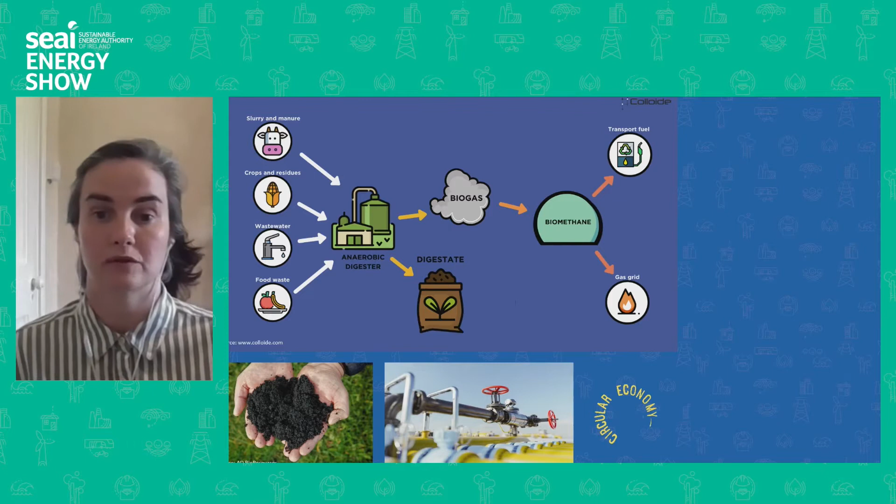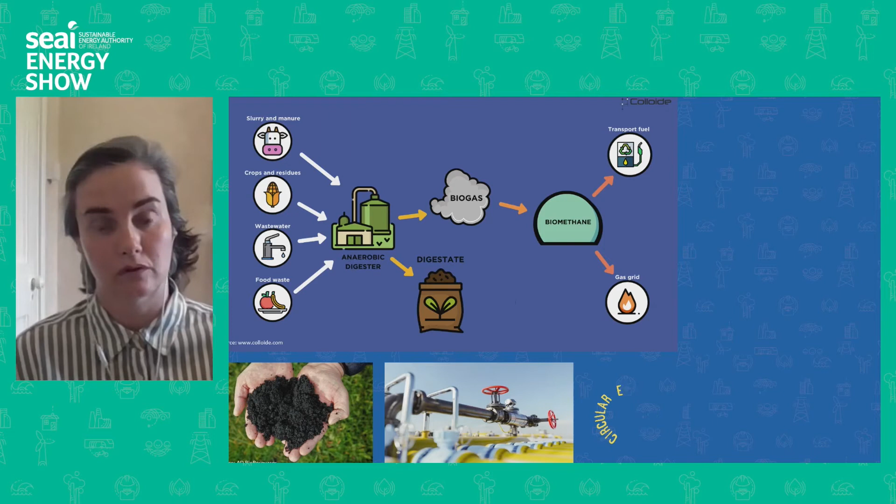Now, for those of you here that know what the anaerobic digestion process is, please bear with me, but part of my role with Green Generation is to make sure that everyone's understanding the process from start to finish.

So anaerobic digestion is the microbial breakdown of organisms in the absence of oxygen. It's the same 4-stage process that happens in cows' stomachs.

So there's two things that come out of the AD process: digestate and biogas. On the bottom left of the screen there, you'll see this digestate, which is used on local farms as a high quality eco-fertilizer.

The other then is biogas, which we upgrade on site into biomethane, and this is also known as renewable gas. So biomethane is a clean, renewable and carbon neutral fuel.

We use it to power our operations on site, in our HGVs, but crucially in terms of the circular economy especially, we inject it back into the national grid at Cush.

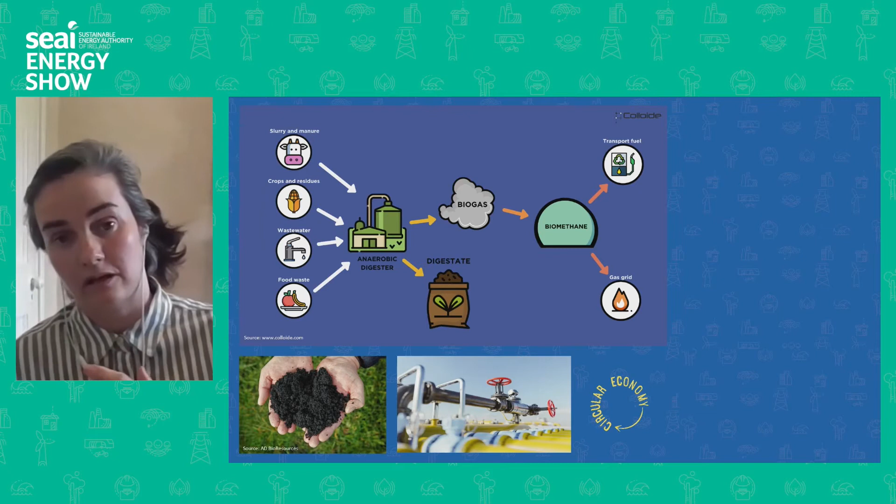On the top right of the screen there, you'll see the Industrial Development Organization circular economy plotted out.

The premise of the circular economy is that we need to move away from the industrial model of take, make, waste. We need to rethink how we see raw materials because we live on a planet of finite resources. The main tool against waste is to first design it out at source, which is optimal. Optimizing the useful life of raw materials is what it's all about.

Then come all the R's: repairing, reusing, reduce, replace, regenerate, and recycle. And then lastly is the reuse of waste as a feedstock for renewable energy.

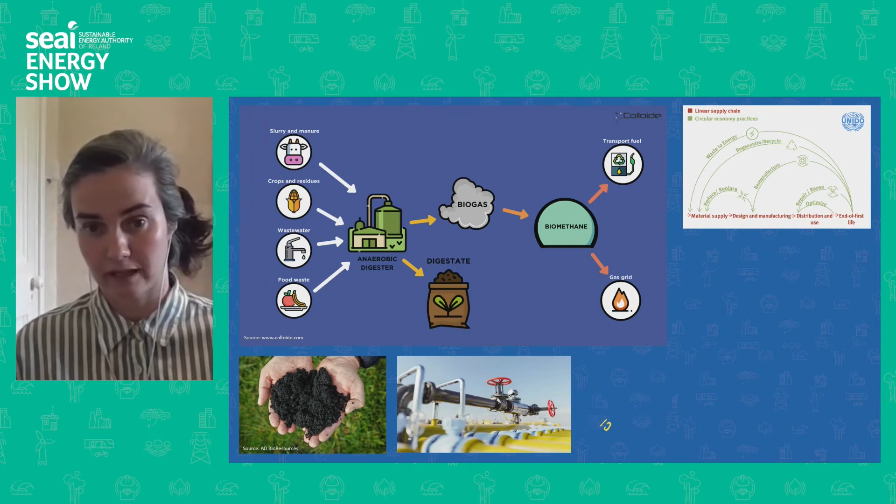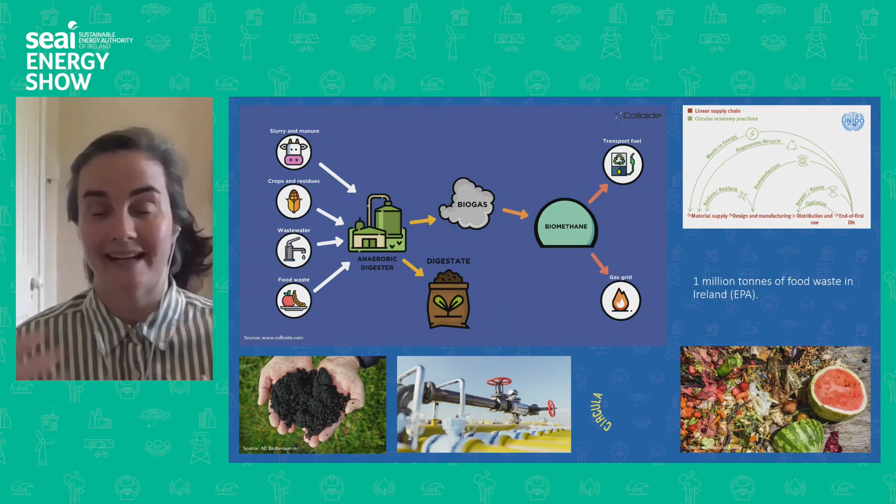Across Ireland, we have 1 million tonnes of food waste every year. Some of it going to AD, some to compost, but sadly an awful lot is still going to landfill. Our main aim here is to make as good a use of this food waste as we can. To give you an idea of the extent of the global food waste problem, if food waste were a country on its own, it would come third only to China and the United States in its greenhouse gas emissions.

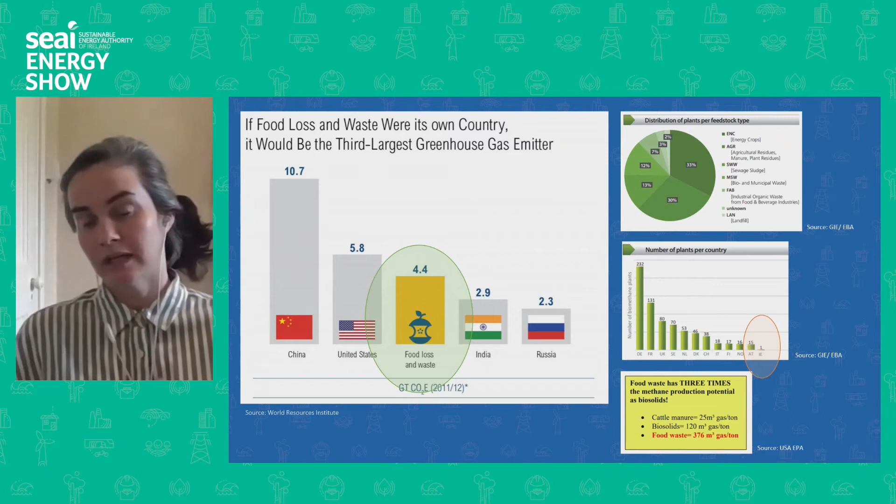But therein lies an opportunity as well. While no one wants any food waste, we can actually use that food waste and pull some value out of it. The GIE and the EBA released a report last year saying only 7% of all anaerobic digestion plants across Europe are using food waste as their feedstock.

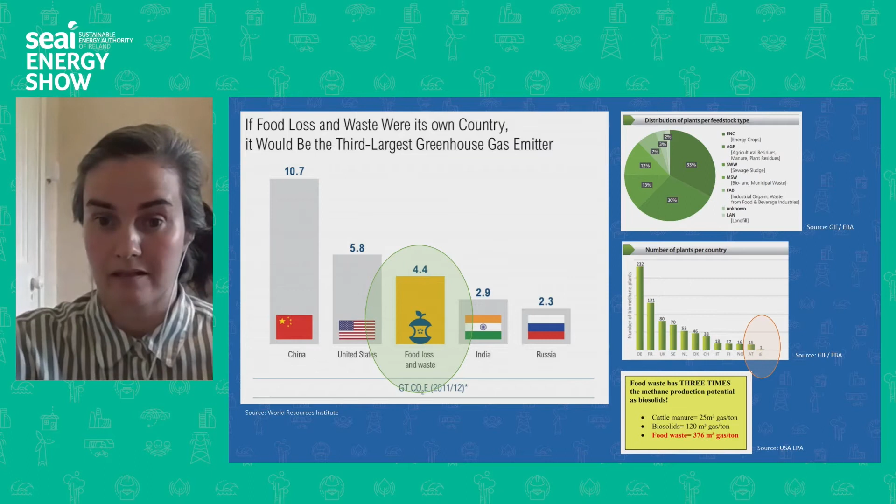And then you'll see the second graph down there. Ireland, we've long been described as the laggards of Europe. We've only one biomethane plant injecting back into the national grid, but you'll see Denmark there sort of halfway down. Denmark has a little over just under 1 million more people than us, and they're using 2/3 of the space, but they managed to have, I think, 47 biomethane plants across the country, which is extraordinary for a small country. So we should be looking to replicate that.

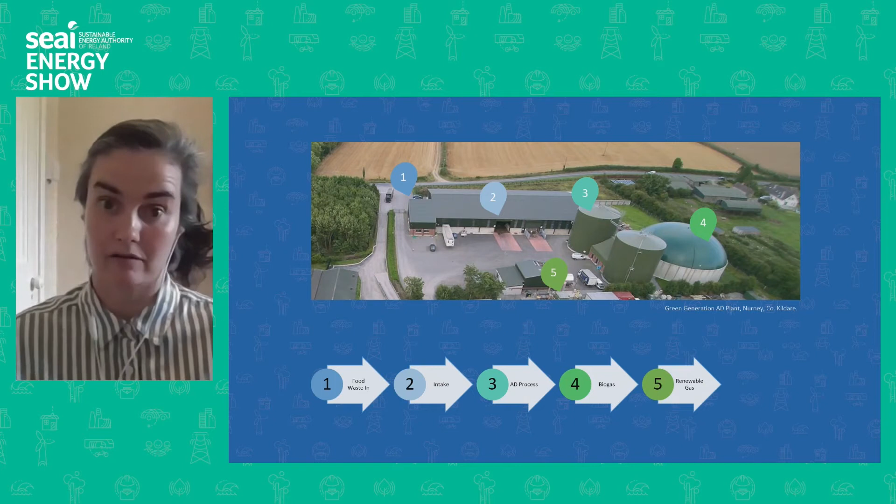If it comes from a manufacturer, it goes straight to the AD towers. If it comes from one of our retail partners, such as Tesco, the food is depackaged, plastic goes one way, food waste goes the other, and again straight into the AD process, which happens at number 3. Once the organic material is broken down, we capture the gas at number 4. Then, as I said before, we upgrade it on site, which is the very exciting part of our circular economy. Once it's upgraded on site, then our circular economy really kicks in.

Last May, the Cush injection point was opened. Green Generation is the only renewable gas company in the country commissioned to inject this renewable gas back into the national grid, meaning that the gas produced and upgraded in Nurney is brought here to Cush. The photo on the right-hand side shows us transferring the gas into pressurized trailers, which is then brought the 8 kilometers to Cush and injected back into the national grid. The picture below that shows a sneak peek at the engine room at Cush.

People often ask us, well, if it's that easy, why aren't loads of people doing it like the Danish? Unfortunately, the investment required in a project like this is enormous. This one was co-funded by the EU, Green Generation, and Gas Networks Ireland.

So I wanted to give you an idea in a very real sense of the emissions that can be saved from using renewable gas. The above information is what you would show as mileage to and from Dublin from Green Generation twice a week. So a return trip is 132 kilometres, twice weekly is 264. Over an annual basis, that is 13,000 kilometres.

Commercialfleet.org has a handy little website that translates your mileage into carbon savings if you're using renewable gas. So the journey we've just talked about using renewable gas will save you over 11,000 kilograms of CO2 per year, which we think is really a big win. But what does that all mean? In terms of planting trees, which a lot of people will connect with, the 11,000 kilograms of CO2 saved is the equivalent of planting 806 mature trees, which is great.

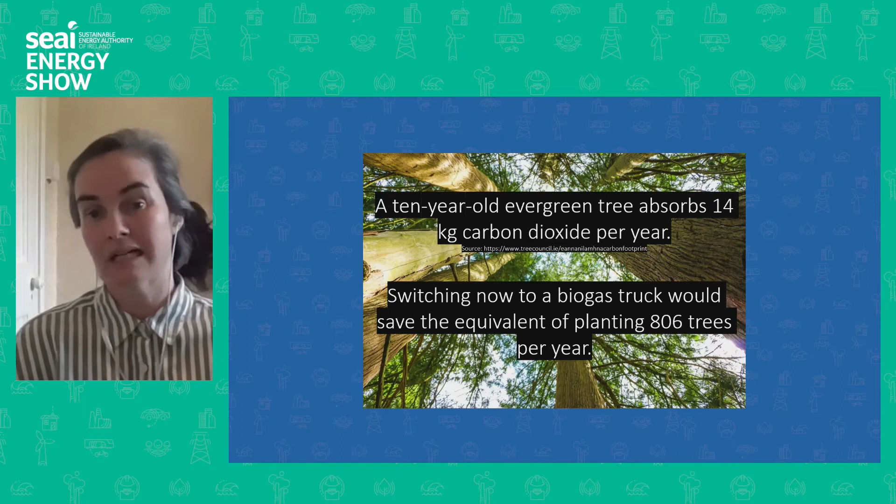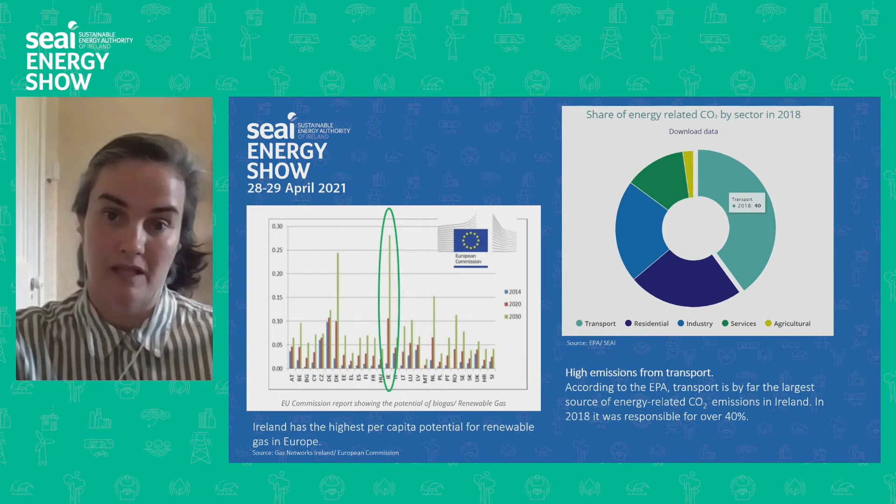But it's not all bad news. A recent report by the EC and Gas Networks Ireland has shown that Ireland has the highest potential for renewable gas production across Europe, and we'll need to harness all of that potential to meet these targets. Ireland's CO2 emissions by sector are shown on the right-hand side, and the transport sector is running at 40%, which is fairly hefty. That brings me to the topic of decarbonising Ireland's transport sector.

According to the Gas Vehicle Network in the UK, there's no other sector across Europe more primed and ready to cut carbon emissions than the HGV sector, particularly long-distance trucks. GNI see the same thing, and they've committed to rolling out fast fill gas stations across the country. There's two already, one in Dublin Port and one in Cashel, with another nine planned over the next period.

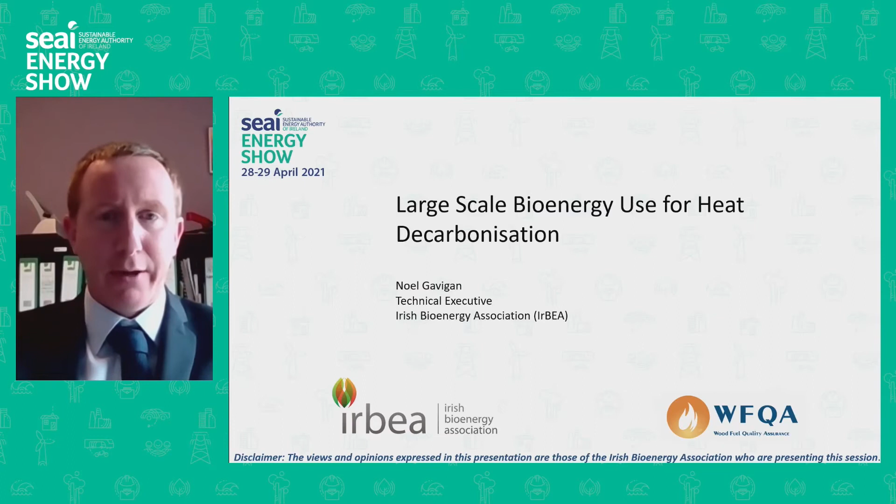Just a quick one on the Irish Bioenergy Association. This slide will be given to you afterwards so you can have a look at what we do. It's an organisation that represents the industry, established 22 years ago, and still going very strong. We represent all areas of bioenergy, from biogas to solid biofuels to liquid biofuels for road transport, and you have plenty more information on our website.

Two of the things that we do which are very relevant to this sector in terms of ensuring that the industry is operating correctly and ensuring that the industry is able to step in and take on large-scale heat use.

The first thing is fuel quality. We set up the Wood Fuel Quality Assurance Scheme back in 2009, along with assistance from the Department of Agriculture, NSAI, SEAI and Waterford IT. Within that, we ensure that fuel suppliers are producing wood fuels to the proper European standards, and also within that standard, there are sustainability requirements.

The big question always when it comes to bioenergy is ensuring that it meets sustainability requirements. We're very comfortable with material we produce here in Ireland because we know where it comes from and we can prove the sustainability of it. So it's a big part of what we do here in terms of making sure that the fuel supply itself is fit for purpose and is fully sustainable.

We have 30 certified suppliers nationwide, and we get continued support from the Department of Agriculture in that scheme. If you check the website there, you can see a map of the suppliers detailed around the country, and there's more details on that on the website.

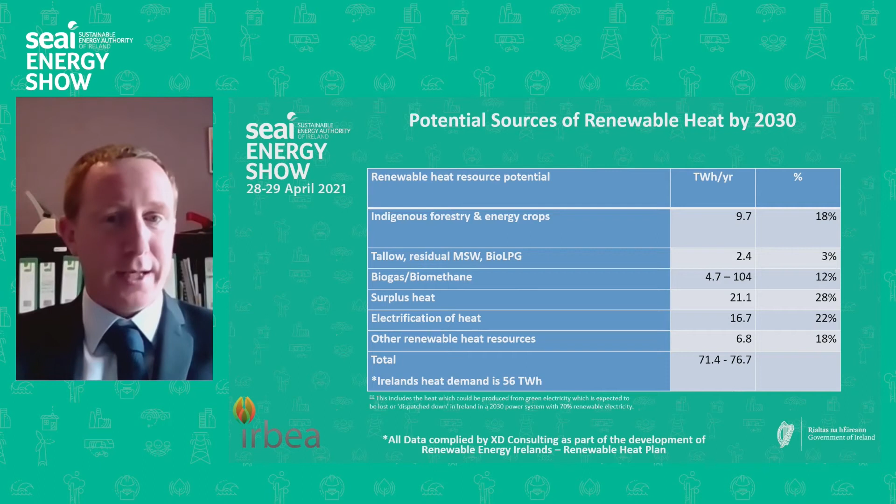We actually have resources for over 70 terawatt hours. So within the country, we have plenty of resources to actually meet that demand. It's really a case of getting things moving, getting the infrastructure in place, and getting the industries in place to meet that demand. The plan is looking at a level less than 100%, but we actually have enough to go to the 100% level if we have the wherewithal to do so. It's just an important point to look at there.

Within the bioenergy sector, we really have three main areas in provision of heat. One is wood pellet, which predominantly goes into the domestic market, commercial and small industrial. Wood pellet in Ireland, almost exclusively, comes from sawdust coming out of wood processing. We harvest our forests to produce lumber for the building sector and other uses, and we have large volumes of sawdust coming out of that sector, all of which goes into wood pellet.

Wood chip again is a byproduct of the forestry part of the industry, where you have pulpwood and thinnings, and material that is not suitable for saw log can be used as wood chip as a fuel source. It's a very abundant source - in fact, it's the largest source we have, and there are huge volumes available.

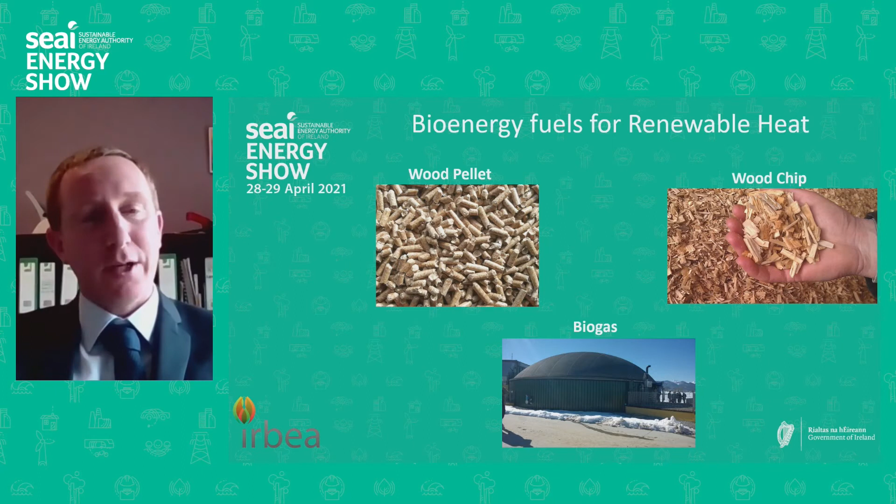Biogas was looked at already, so I won't dwell too much into that, but we can upgrade biogas into the grid and use that in gas boilers all around the country. Or we can use standalone units, which we're doing a project on at the moment, in particular where you have the feedstock on site - you can use that heating on site as well, which is a lower cost option.

So again, where is bioenergy's role and why is it important? Just very quickly, on a worldwide platform, bioenergy provides two-thirds of all renewable energy that's out there. So when you take hydro, wind, solar, geothermal, they're about a third when you add them all together. But bioenergy provides two-thirds of the world's renewable sources of energy at this point in time.

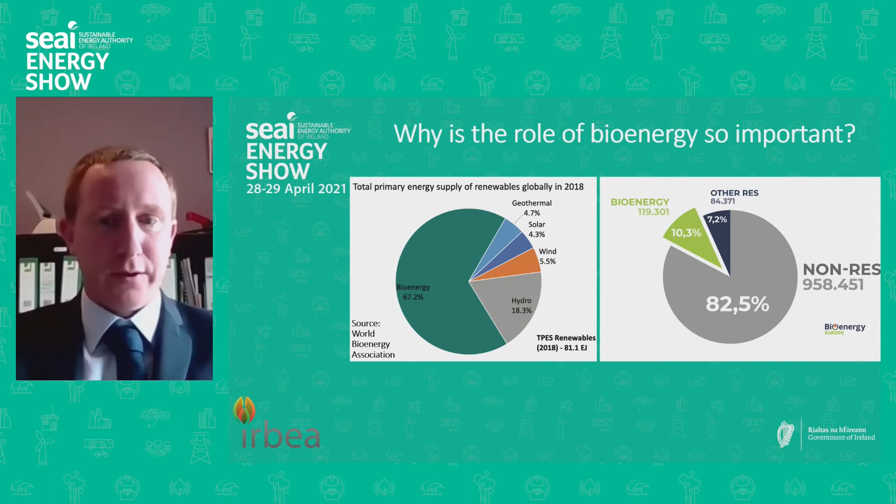On a European context, about 10.3% of all energy is coming from bioenergy. The other renewables are coming up at a little over 7%. That's increasing a little bit since then. But as you can see, bioenergy is a major player already, and we have very well developed industries and technologies right across Europe. Not as strong here in Ireland. We're not near 10% here, but across Europe there are very strong industries that have really taken up the baton on this. The value of biomass compared to oil.

Just to do this, it's a very good comparison to look at the economics, and it's always a question of what goes on. So the comparison I'm doing here is, if you take 1,000 litres of kerosene, it's the equivalent of 3 tons, or to replace that, you would need 3 tons of wood chip to get the same level of energy. If you look at how the cost breakdown is, I won't go into the minute detail, but we're currently paying 61 cents per litre. Some of that is VAT, some is carbon tax, some is transport, and the remainder is the price it costs the oil to come out of Rotterdam or a refinery, wherever that happens to be. And that's where the cost is made up.

So out of that total cost, about 610 euros, the exported funds out of that are about 370 when you take out the taxes and transport. So there's quite a lot of export funds going out of that.

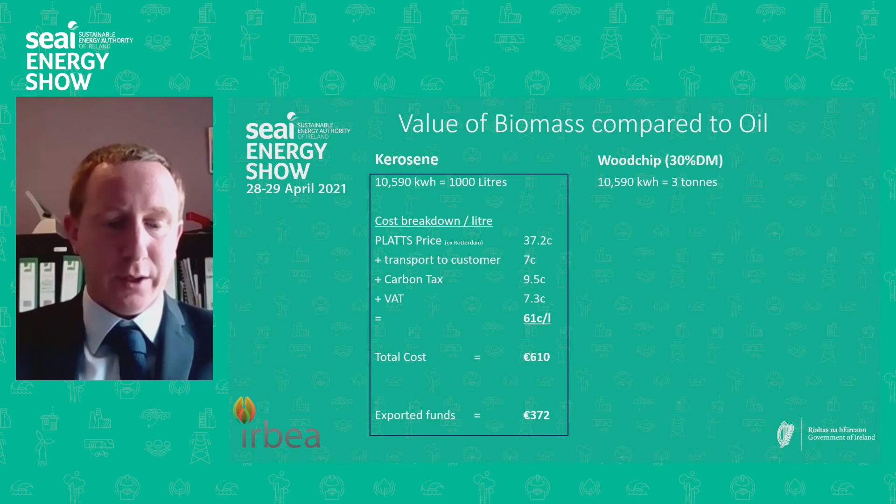In terms of wood chip, the cost for that is currently trading at about 130 euros a tonne, and it's stayed very steady over the last 10 years. It doesn't fluctuate. It was 120 ten years ago, it's about 130 now. Again looking at that, the overall cost per tonne comes out at 147. The customer cost there is at 440 euros. So there's a customer saving of about 170 euros straight out. Now obviously you have to pay for a boiler to operate it, but there's 170 euros on a flat rate fuel use basis.

The other interesting point is that the vast majority of the money spent, of that 442, remains in the local economy. It remains within Ireland and generally within about 50 kilometres. There's only about 50 euros of all that spend that is exported, that goes to buying equipment, be it the boilers or the machinery. That's money that leaves the economy. So wood chip as a material itself really supports the local economy, as well as getting approximately, for 1,000 litres of kerosene, a little over 2.5 tonnes of CO2 being saved. So it does make a major difference.

In terms of greenhouse gas emissions, it's a little difficult to see on my screen, possibly for yourself as well. The wood chip and wood pellet are the first two blocks there. This is the emissions in grams of CO2 per megajoule. Wood chip is at 4 grams, wood pellet is at 7 grams. The next two are related to biogas, one from slurry, the other from grass. The tallest one there is kerosene at 80 grams. Compare that with wood chip at 4 grams - kerosene is at 80 grams. The next one over is heat pumps. Now this is based on figures from 2 years ago where the electricity grid was at 400 grams of CO2 per kilowatt hour, but it's 36 grams per unit of heat. That'll come down to about 18 if we get the grid down to 200 grams. So it's still relatively high compared to the wood chip and wood pellet.

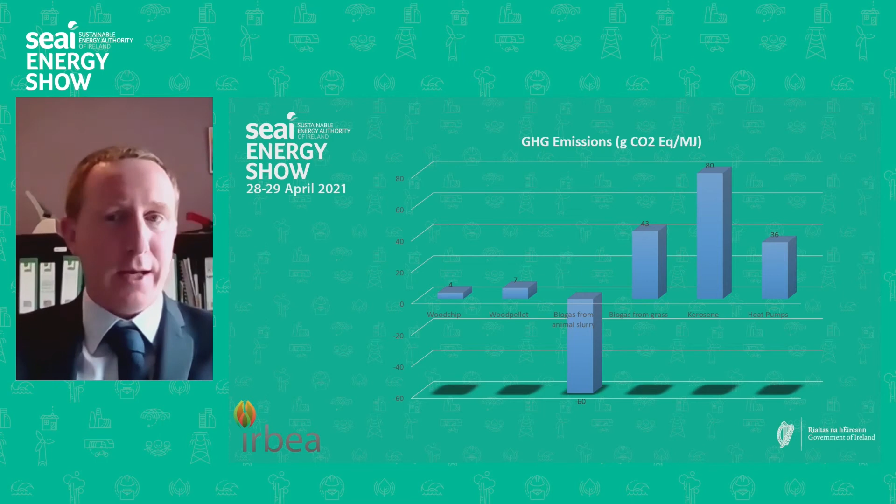So wood really does deliver huge carbon savings, and it is something that really should be central to the mix. But there's a need for all technologies.

Those sort of temperatures can only be reached by biomass or biogas. So the bioenergy sector is the only renewable source of heat that can provide those sort of temperatures, with the exception of electricity, which would be more expensive. So it's well worth bearing in mind that bioenergy has a huge part to play in that.

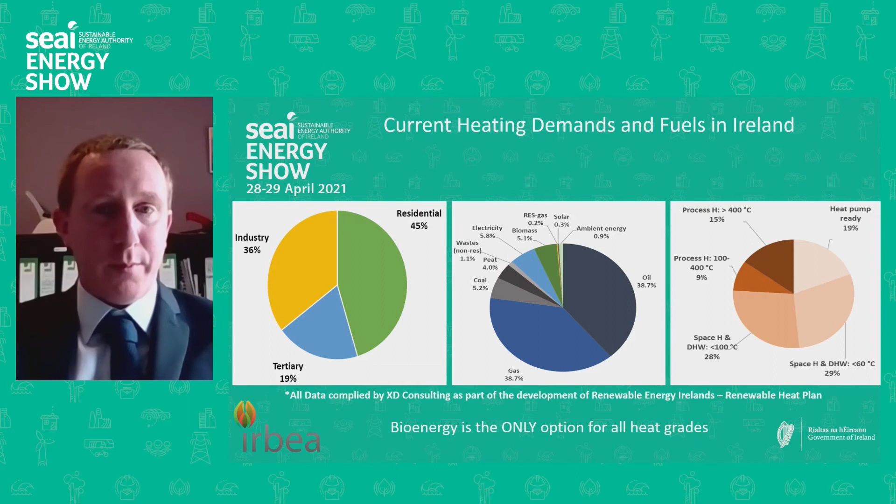A little bit on the sustainability criteria, you can read into that further, but I won't in this presentation. Just to give you an outline of large biomass plants, we have a number in Ireland as it stands. Danone there, a 4 megawatt steam boiler, Aurivo with a 10 megawatt steam boiler. Again, they're large industries in the dairy sector that need large volumes of heat. They need high temperature heat with steam, and the only way of taking that on board is really with bioenergy.

Danone, that site is the first carbon certified neutral plant in the world, and they got that achievement I think it was late last year.

The other one I have here is Astellas. Astellas is a 1.8 megawatt biomass steam generator on that site, and it's a very interesting one. It's rooted in pharmaceutical, and it's a very, very high efficiency plant. It's ISO 50001 certified, and they rely on steam coming from biomass, and it has worked very well for them. They're a little over 10 years in operation at this point, and there are many others around the country in different industries.

I just want to give you a quick rundown through district heating in terms of its value to us, and it's a good example of where large-scale bioenergy can fit into these systems. So Grindsted in Denmark, they put in a 4 megawatt district heating plant in the last decade, fueled by wood chip. What was interesting on this one is when they originally put in the district heating system, it was run on coal in the 1950s. In the 1970s they changed it over to gas, and now they're changing it over to biomass. So district heating as a concept works very, very well, and you have huge resilience to change fuel as technology changes.

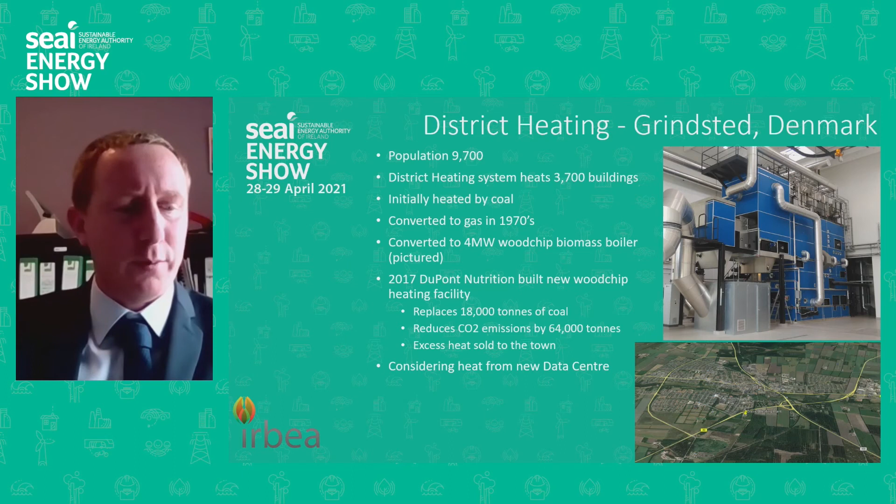It just shows that they're also looking at heat from a data center as well. So district heating works very, very well in these sort of towns, and biomass often plays a central role in providing the base load. Again, you're looking at very large scale there, 4 megawatt up. The Copenhagen system, I'm not sure what size that is, but 95% plus of Copenhagen runs on a district heating system, and again with a large base of biomass.

So a couple of policy interventions that we do need to decarbonize our heat and really capitalize on bioenergy. Green public procurement for buildings, we really need to get that rolled out as quickly as possible. Only in the last week we've seen a tender for a third level institution in the northeast that has put out a tender for gas. So they're going to put in a gas boiler, and they're tied into using that fuel for the next 20 years, whereas it really should be opened up to any option that can provide that heat on a renewable front, whether it's biomass or renewable biogas. It should be opened up rather than being fixed on a fossil fuel. I think we need to be looking at how public procurement handles those things.

So then the support scheme for renewable heat, again, possibly widen it out for the larger scale. We do need to see an implementation of Article 23, RED 2 Directive, basically a heat obligation scheme, and some supports for the domestic heating sector as well. I'm a little bit over my time, so I'll close up with that, Sean.